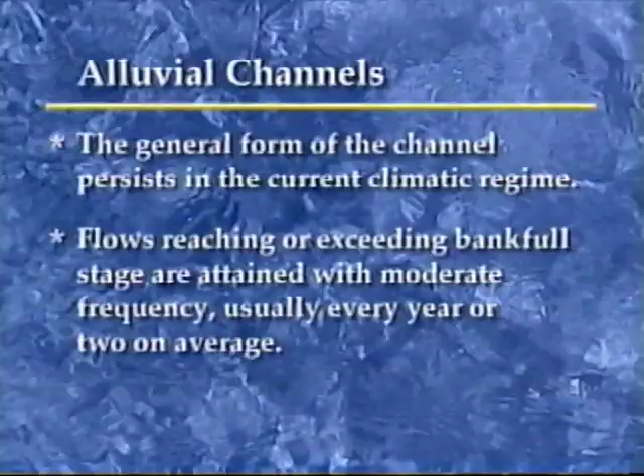Some other commonly accepted generalizations about alluvial channels are that the general form of the channel persists in the current climatic regime. Flows reaching or exceeding bankfull stage are attained with moderate frequency, usually every year or two on average. Bankfull flow is a surrogate for the full range of flows that form the channel. Bankfull flow completely fills the principal channel to the elevation of the floodplain.

The bankfull, then, is a surrogate, in a sense, for the whole range of flows which make up the channel, but proves to be a value that can be useful in talking about the behavior of the stream channel and, in part, the range of flows that matter in sediment transport.

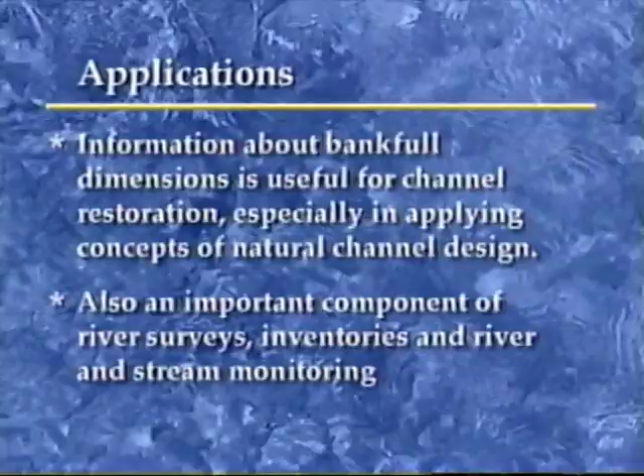Information about bankfull dimensions is useful for channel restoration, especially in applying concepts of natural channel design. Information about bankfull discharge and the bankfull stage is also an important component of river surveys, inventories, and river and stream monitoring. Many protocols rely in part on some aspect of bankfull stage and discharge identification. In all cases, correct and consistent field technique is essential in providing scientifically defensible information.

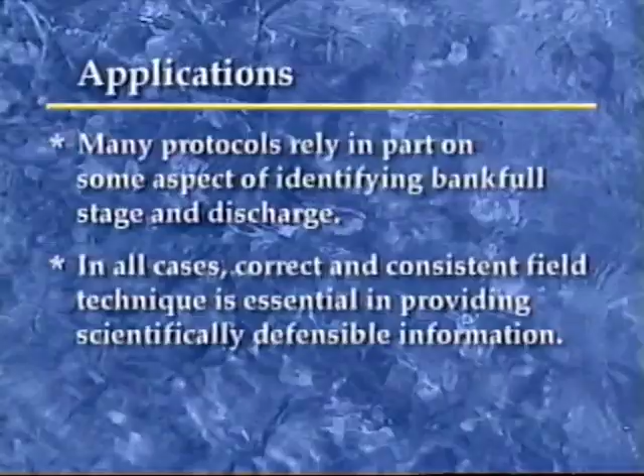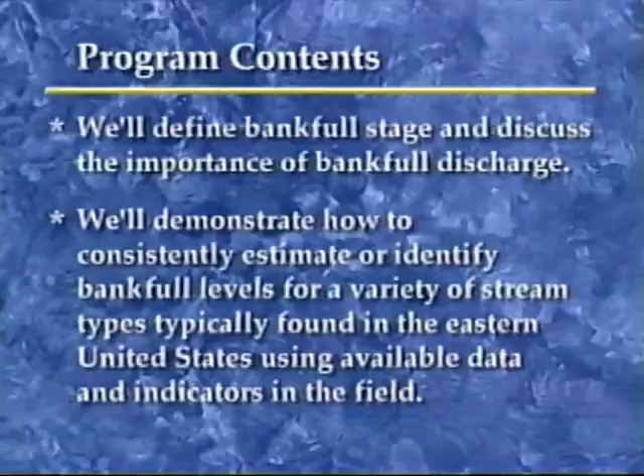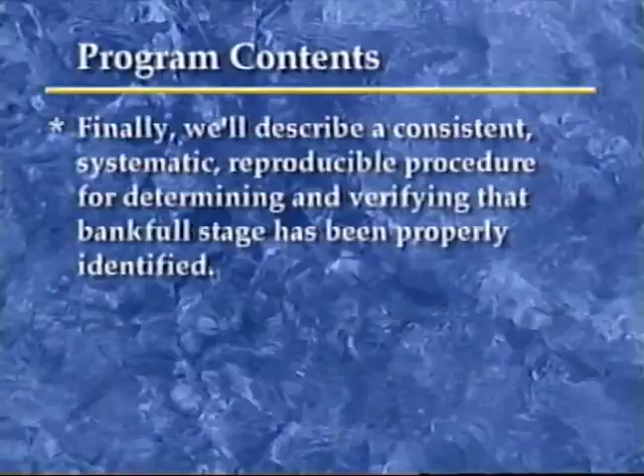In this program, we'll discuss various aspects of bankfull determination. We'll define bankfull stage and discuss the importance of bankfull discharge. We'll demonstrate how to consistently estimate or identify bankfull levels for a variety of stream types typically found in forested areas in the eastern United States, using available data and indicators in the field. Finally, we'll describe a consistent, systematic, reproducible procedure for determining and verifying that bankfull stage has been properly identified.

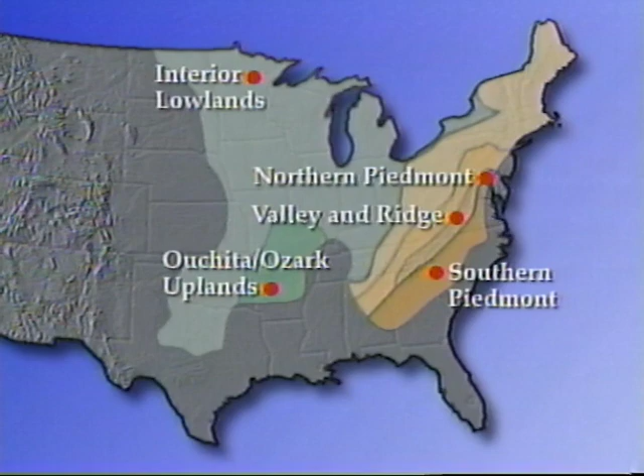As shown here, our discussion of bankfull stage in this presentation will focus on forested streams representative of those found in a variety of different regions in the eastern United States.

Bankfull stage is defined as that stage when stream water just begins to overtop the floodplain. The floodplain is defined as a relatively flat depositional surface adjacent to the stream and being built and rebuilt by the stream in the present hydrologic regime. Accordingly, a floodplain along one or both banks is necessary for the determination of bankfull stage. Bankfull stage, then, is the stage at which water just begins to flow onto the floodplain.

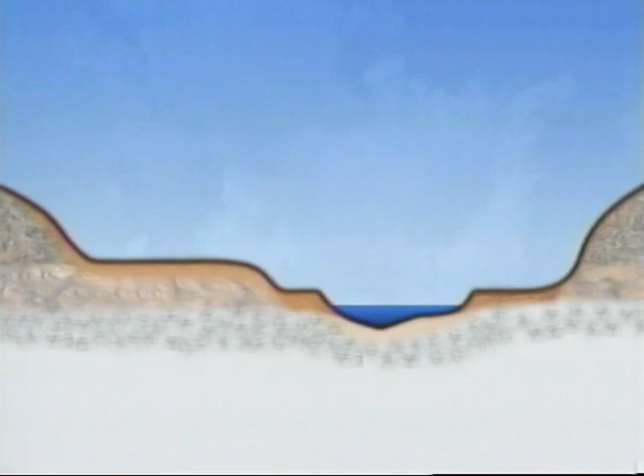The key to identifying bankfull level is to identify the floodplain, the flat depositional surface immediately adjacent to the river that is formed and reformed by the river under current hydrologic conditions. Although shown as flat surfaces in this diagram, floodplains and terraces may slope away from the channel slightly and may be traversed by a complex mosaic of remnant features, depressions, or subtle swales of previous channel positions. In many instances, natural levees slightly above the bankfull stage will border the channel.

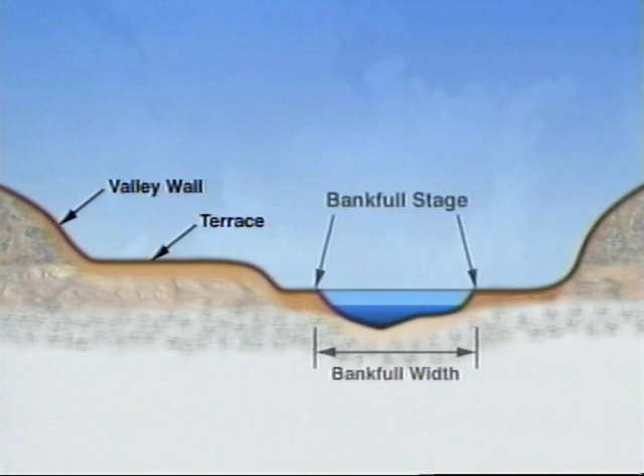The important thing to remember is that Bankfull stage occurs when water just begins to overtop the floodplain. The key to identifying Bankfull stage is to locate the relatively flat depositional surface of the floodplain. The Bankfull stage, of course, represents an integration of a range of flows that carry a range of discharges as well as a range of sediment in transport.

And hence, in a way, the Bankfull discharge is a surrogate or substitute for the sequence of flows responsible for the formation of the channel. It can be useful then in that surrogate sense, but it does not physically describe in and by itself the flow that has made the channel, because that is not a constant flow. It is a range of flows from low to high, requiring both deposition in the one instance and erosion at the same time.

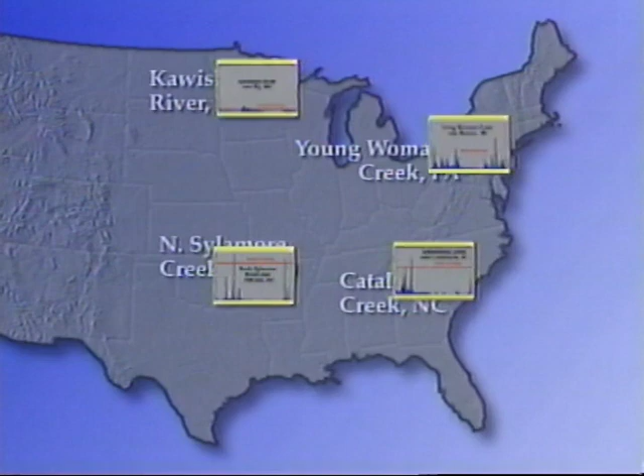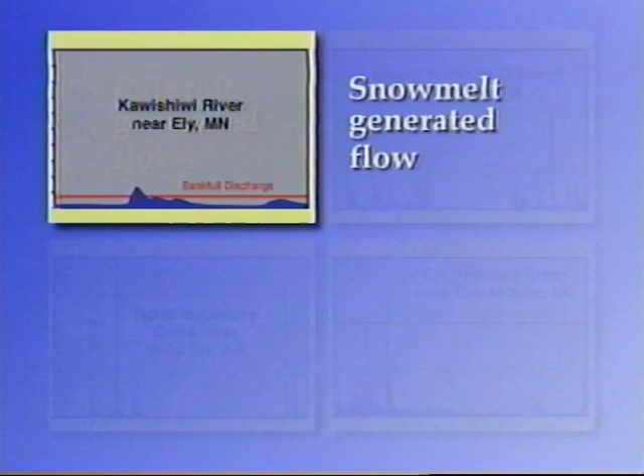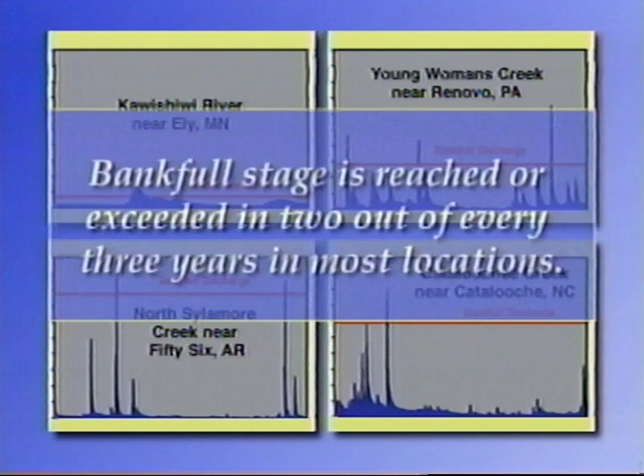Now let's look at data from 4 U.S. Geological Survey hydrologic benchmark station sites and discuss the frequency at which Bankfull flows occur in different regions of the eastern United States. Hydrographs for these sites illustrating unit runoff to the same scale over a single year show seasonal trends that are principally generated both from snowmelt and from rainfall. Peak discharges in any given year in any given location may be greater or lesser than those shown here. On average, Bankfull stage is reached or exceeded in 2 out of every 3 years in most locations.

Compared to other regions of the east, runoff in Minnesota tends to be of lower magnitude than moister areas in the east and south. When Bankfull stage is reached during spring runoff, flows frequently stay above Bankfull for extended periods of time. Occasionally, there may be short periods of above bank flows from rains in the fall. By contrast, in most other streams in the east and south, the timing of flows exceeding Bankfull discharge is very irregular, typically occurring 2 to 3 times a year.

Because these flows depend on large storms or saturated soil conditions, they tend to stay above Bankfull for short periods of time. However, the cumulative duration of flows exceeding Bankfull stage in these rain-dominated systems is approximately equal to that from snowmelt regimes and are therefore sufficient to accomplish the work necessary to form and maintain the channel.

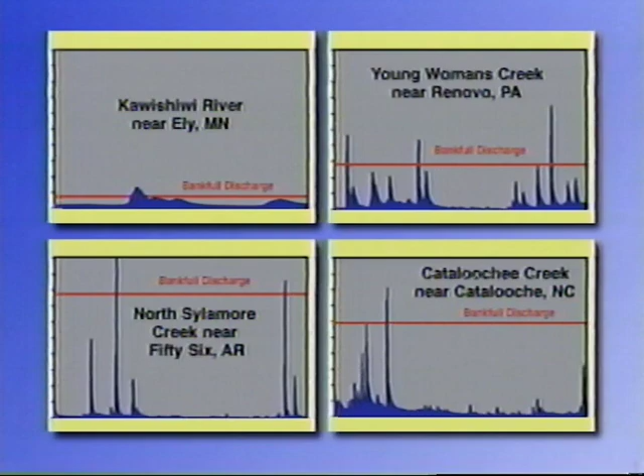Flow in these regimes is driven by rainfall events. Large rainfall events may occur any time during the year. In the snowmelt regime, it occurs only at one particular time of the year, and it is all at one time, whereas there may be successive bankfull events in a year, the cumulative duration of which may be similar to a snowmelt event, and this supposes that the amount of work being done would be similar in both cases.

Most people take finding the bankfull elevation seriously, and you should too. But to be honest, when you're new at this game, you're probably too conscientious, maybe too picky, too enthusiastic. A lot of people jump right into the channel and start looking for the bankfull elevation. There are just too many opportunities to pick up false indicators when your eyes start down in the channel. Instead, back up and get the bigger picture.

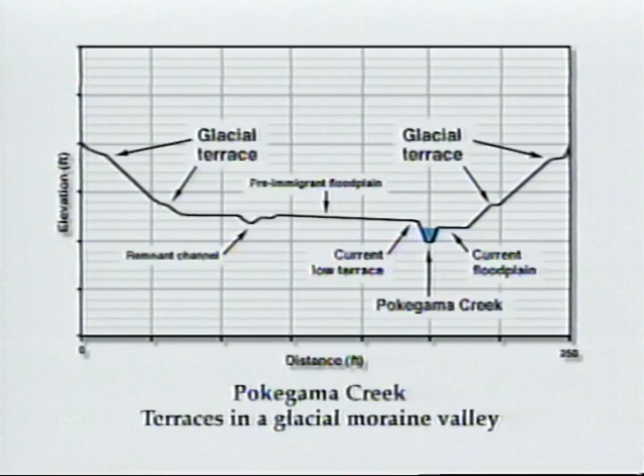We're southwest of Grand Rapids now on the Sugar Hills Moraine, a glacial terminal moraine. And as we look across this valley, we see the high hills on either side of it. These are glacial terraces. And there are several levels, 2, 3, 4, even 5 levels as we go down these hills. But what I want you to see before we get to the stream is the valley flat. That's the elevation where you want to begin looking for the bankfull elevation.

When we get down closer, we can look and see if there is a low terrace and, of course, the actively forming floodplain. This area was harvested first in about 1872 when large white pine were removed. At that time, Pokegama Creek behind us in the center of the valley downcut about a foot. So let's go down and see if we can find the difference between the low terrace and the floodplain.

We're down in the valley of Pokegama Creek, an E5 channel, sandy sediment. I'm standing here on a low terrace, but if you look behind me, you can see the high hill, which is the glacial terrace. About midway down the hill is a mid-terrace. I'm on a low terrace. It's the elevation of the floodplain over 130 years ago. The slackwater channel in front of that terrace is the channel in 1872 when the white pine was cut.

And the active channel is about 10 inches lower in the foreground. And you can see where its floodplain is now. So this stream has downcut about 10 inches. But think about the valley that you're in when you're looking at low terraces. For instance, we might be in New Hampshire or Maine on the Whitewater River where sediment is the size of big cobble like footballs, and the stream may be a river 150 feet across. In a bigger scale situation, the low terrace may be 2, 3, even 4 feet above the current floodplain.

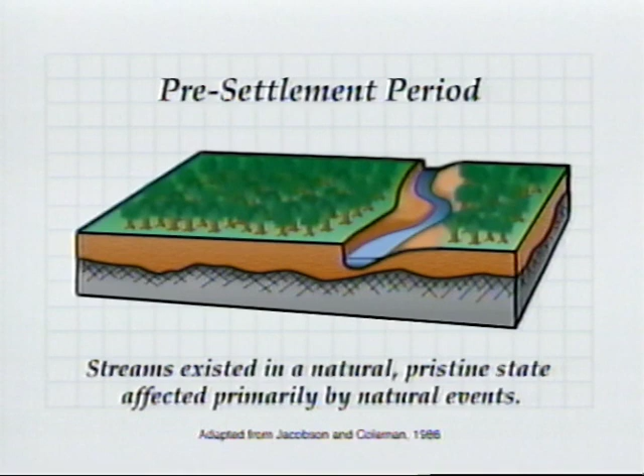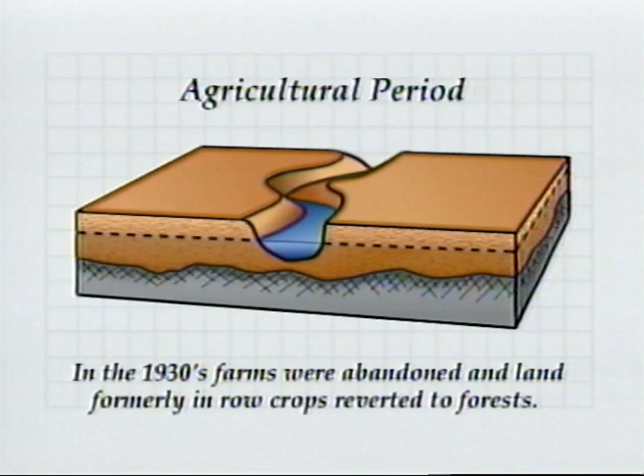In many parts of the south and east, land was heavily forested in the pre-settlement period. Streams existed in a natural, pristine state, affected primarily by natural events. As settlement in the agricultural period began, forests were cleared and replaced by crops. Poor land use practices and farming techniques resulted in excessive upland erosion and extensive sedimentation, leaving alluvial deposits of up to 6 feet thick on the floodplains. In the 1930s, farms were abandoned and land formerly in row crops reverted to forests.

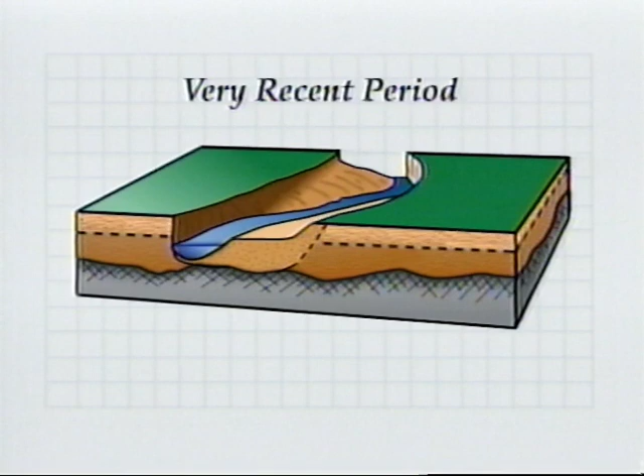With a general reduction in sediment load during the very recent period, a reworking of stored floodplain sediment has occurred. Downcutting and stream migration has resulted in export of fine sediment, retention of a smaller volume of coarse sediment, and streams have built new floodplains at lower elevations, leaving abandoned floodplains or terraces behind at higher elevations. Terraces may be formed over several periods of alluvial deposition and stream incision. Occurring repeatedly, it's possible to develop any number of terraces.

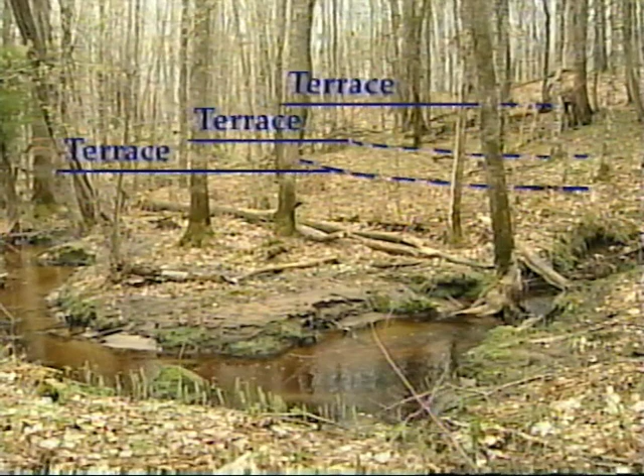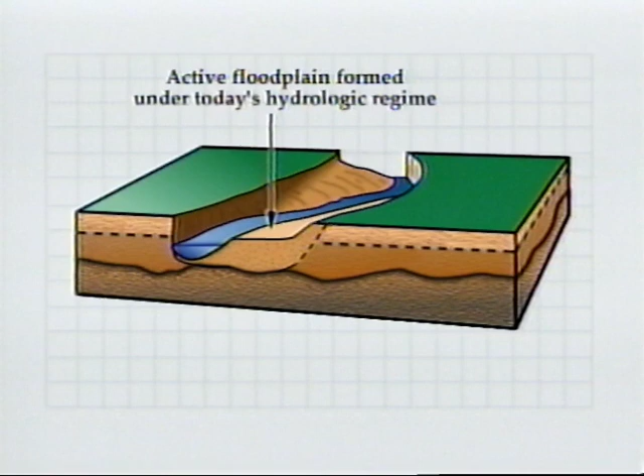In the present day, terrace remnants may be relatively continuous along a valley or only remain in isolated patches. Generally, when several terraces are present, it may be difficult to distinguish between the lowest terrace and the floodplain. Understanding past land use practices and geomorphic history can be useful in bankfull identification and help us properly differentiate the floodplain formed under today's hydrologic regime from terraces that were formed under different hydrologic regimes.

We're at Mantua Mill on Western Run in Baltimore County. This is in the Piedmont of the state of Maryland. I'm standing at the left edge of the water, and we flattened the grass here, and the depositional surface of the point bar is gradual, as you can see as I walk up the surface to the edge here of the floodplain, the flat surface that we're defining beyond.

The Bankfull stage then would be approximately where I'm standing, as defined by the intersection of the surface of the floodplain. Under ideal circumstances, one might have a similar surface on the opposite side, and the topographic feature defining the floodplain and the intersection with the Bankfull stage is critical in the field. One will often, not surprisingly in the field, have to clear away the vegetation to make sure that you're walking on a surface and not visually misperceiving the elevation of that surface.

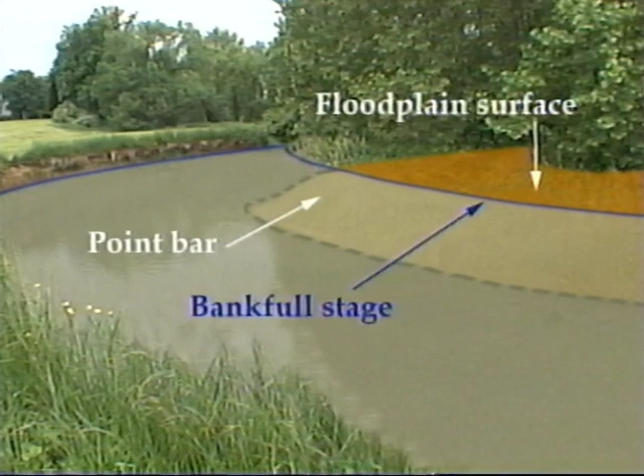Point bars are sloping surfaces found at the inside of meander bends. The floodplain often forms at the top of point bars as channels migrate laterally across a valley over time. The top of the point bar, therefore, is one of the best indicators of Bankfull stage. Let's see how the top of the point bar corresponds to Bankfull stage in a different setting, at Barbours Creek, a 13-square-mile watershed in the Appalachian Valley and Ridge province of Virginia.

One of the best indicators of Bankfull is the level top of the point bar. As I'm standing here, I am on the sloping surface of the point bar. I'll walk up slope. The slope flattens out, and now I'm standing at Bankfull elevation. At my feet are gravel and sand. As I go up slope beyond this, there's a transition to soil and vegetation.

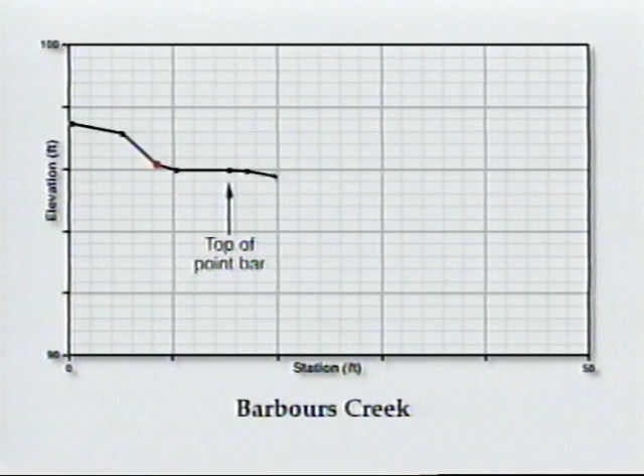The flow frequency associated with Bankfull at this location was determined using the HEC-RAS computer model and regional flood frequency regression curves. Based on this information, Bankfull approximates the 1.3-year flood event. Further up the slope, we have a low terrace that corresponds approximately to a 5-year flood interval. It's important to differentiate between the floodplain and the terrace.

As I step down here, I'm now standing on the flat upper surface of the point bar that represents Bankfull. Susan to my left is standing on a terrace that's inundated by approximately a 5-year flood event. Remember, Bankfull is the flat depositional surface at the top of the point bar. I'll place 2 flags here to show you where it is. And now walk down the sloping surface on the facet of the point bar to the water's edge to show you the relationship between the water and Bankfull at the top of the point bar.

I'm standing here in Gulf Creek in the Ouachita Mountains of central Arkansas. The Ouachita Mountains, along with the Boston Mountains and the Ozark-Salem Plateau, make up a physiographic region known as the Interior Highlands. The basin area at this point is about 5 square miles. Up here, we can see a very well expressed floodplain along Gulf Creek. Here we can see clear signs of floodplain development that we can use for identifying the Bankfull stage. In my opinion, the floodplain level is the only consistent indicator that we can confidently use in the interior highlands

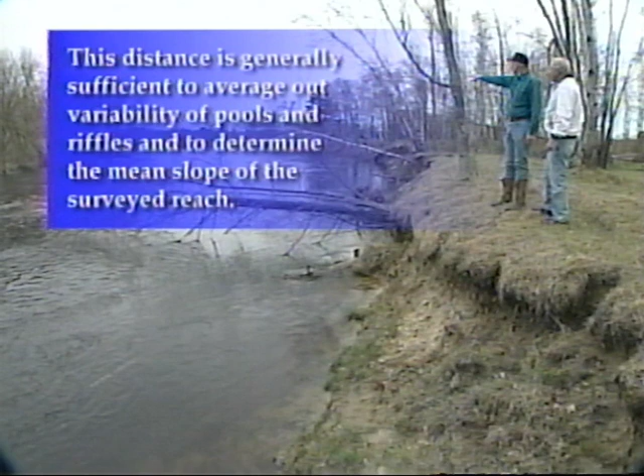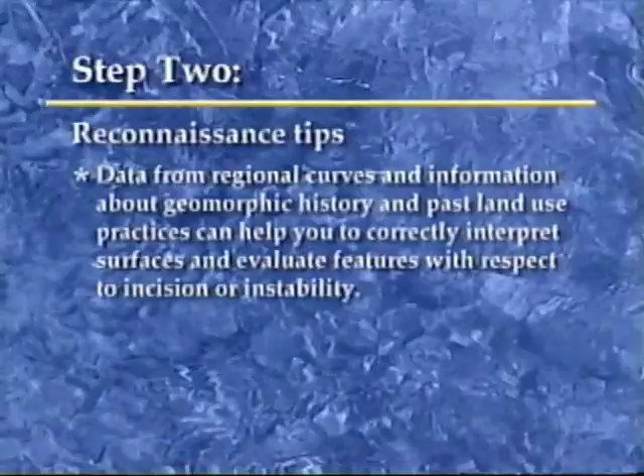A second step is to select a representative reach of the river in the field where a consistent bankfull elevation can be determined. Begin by doing a reconnaissance of the stream reach. Walk the reach for a distance of at least 20 to 30 channel widths to look for probable bankfull indicators. This distance is generally sufficient to average out variability of pools and riffles and to determine the mean slope of the surveyed reach. Data from regional curves and information about geomorphic history and past land use practices can help you to correctly interpret surfaces and evaluate features with respect to incision or instability.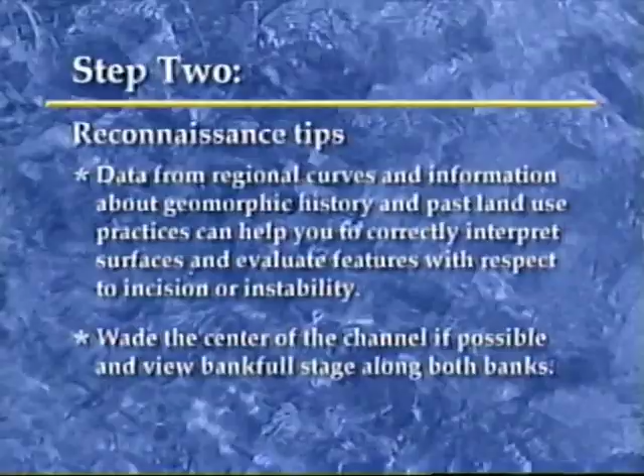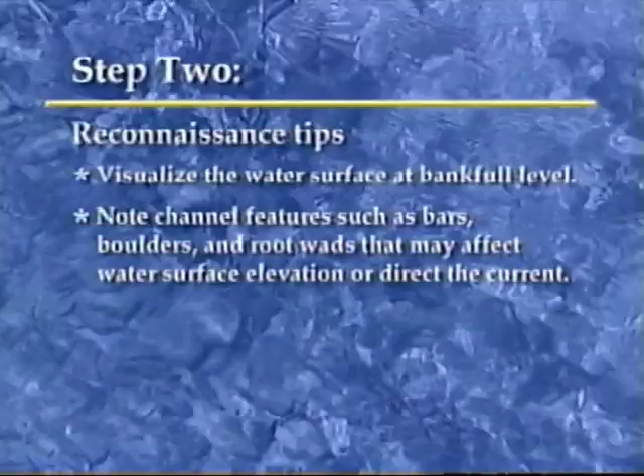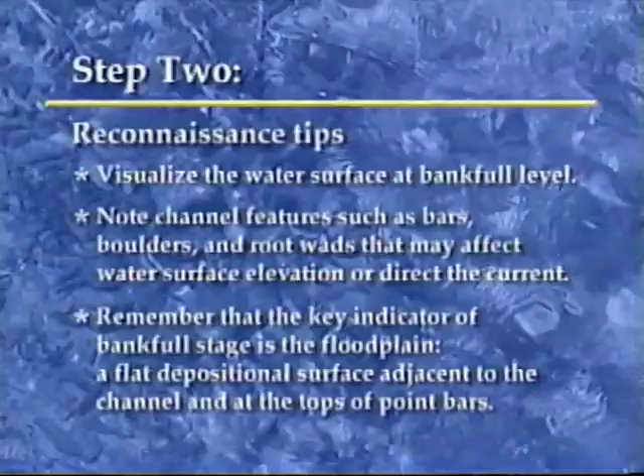Wade the center of the channel if possible and view bankfull stage along both banks. Visualize the water surface at bankfull and note channel features such as bars, boulders, and root wads that may affect water surface elevation or direct the current. Remember that the key indicator of bankfull stage is the floodplain, a flat depositional surface adjacent to the channel and at the tops of point bars.

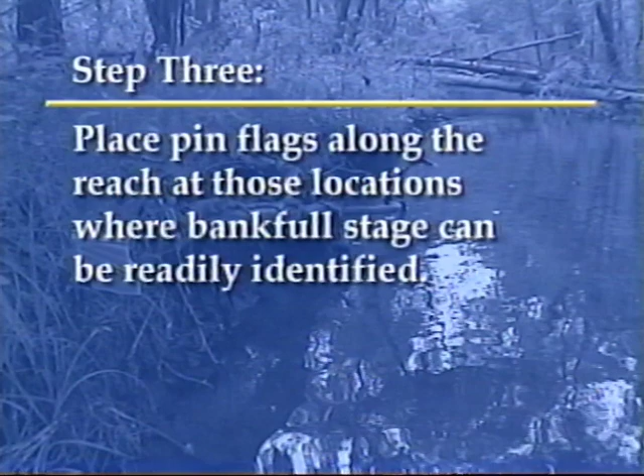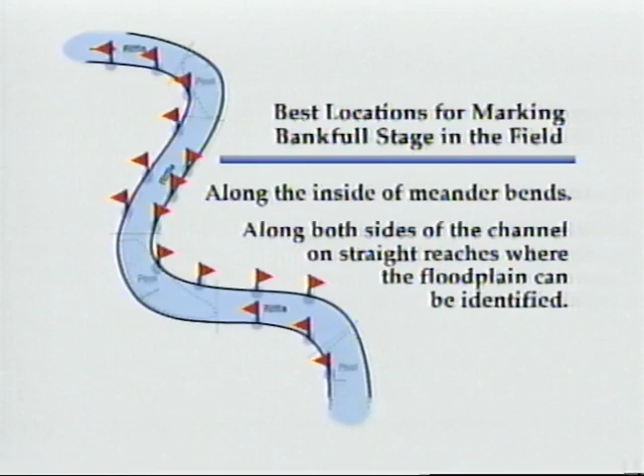When you have a general idea of where bankfull stage may be, place pin flags along the reach, but only at those locations where bankfull stage can be readily identified. That is, at locations where good indicators of bankfull exist. This generally means placing flags along the inside of meander bends and along both sides of the channel on straight reaches where the floodplain can be identified.

Avoid areas with active bank slumping, including the outside of meander bends, bedrock outcrops, areas with log jams, beaver dams, sections immediately above or below road crossings, and any areas with channel alterations or obstructions that might artificially raise or lower local water stage.

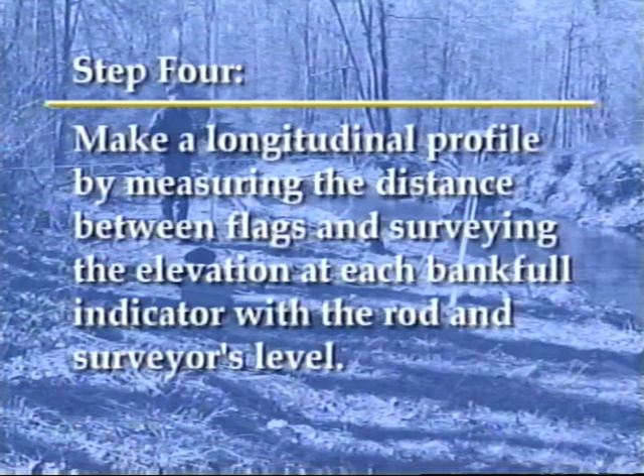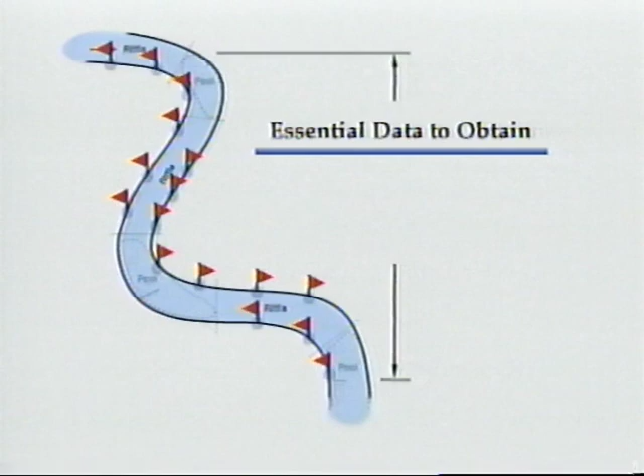The final test of bankfull stage is to make a longitudinal profile by measuring the distance between flags and surveying the elevation at each bankfull indicator with the rod and surveyor's level. While we can't cover all aspects of surveying a longitudinal profile here, the essential data to obtain is a distance and an elevation measurement down the center of the channel at each bankfull stage flag.

Specifics of how to do this can be found in the U.S. Forest Service publication, Stream Channel Reference Sites: An Illustrated Guide to Field Technique, and references such as Dunne and Leopold's book, Water in Environmental Planning, and Luna Leopold's book, A View of the River.

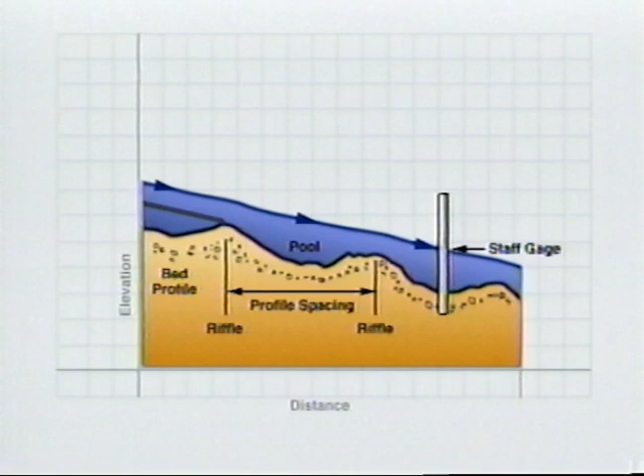Let's look briefly at typical relationships between channel features and the elevation at which they occur. Understanding these relationships can help you evaluate data obtained from a longitudinal profile. An important concept to understand is that as the water rises over bankfull during a flood, differences in the appearance of the water over pools and riffles tend to disappear, and floodplain deposition occurs. As a result, the slope of the riffles along the channel bed, the water surface, the surface of the floodplain deposited at bankfull stage, and the surfaces of terraces will all be close to parallel over a distance of about 20 times the channel width.

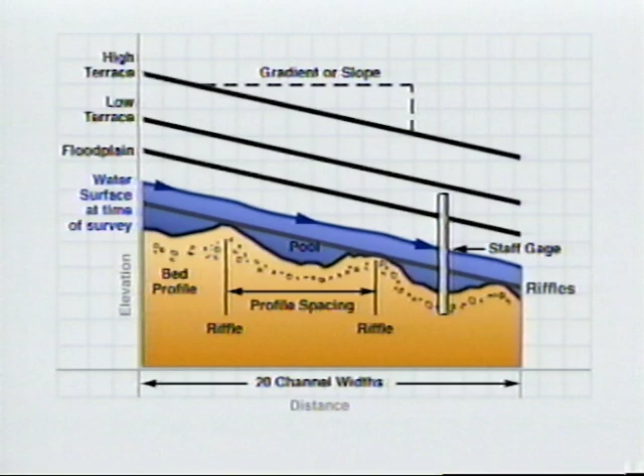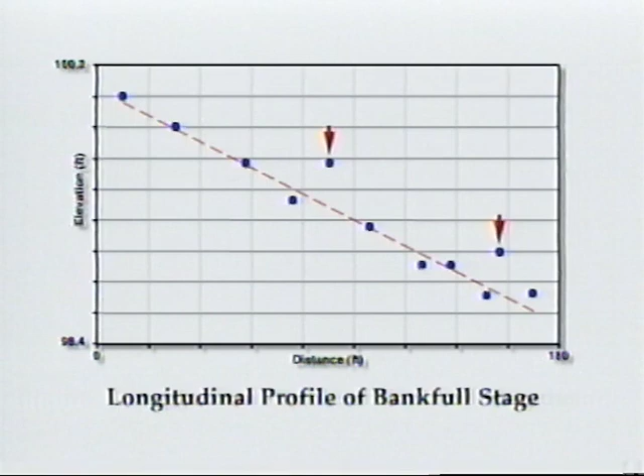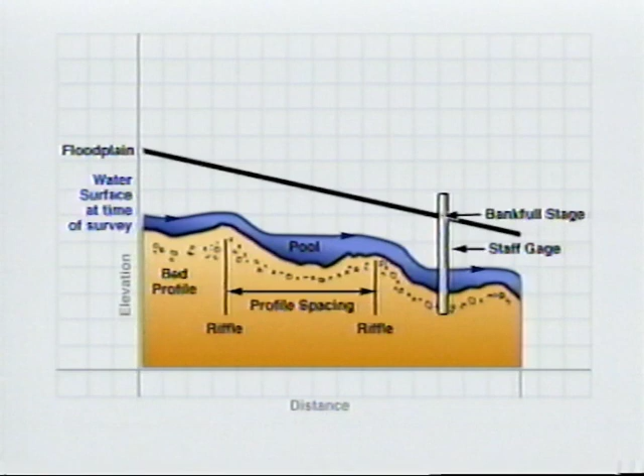The elevation of your flagged bankfull stages should be approximately parallel to the elevation of these other features along the longitudinal profile. By plotting data in the field, bankfull stage identification errors can be noted. Outlying points will be evident and may be rechecked and corrected if necessary. Where your longitudinal profile passes a stream gauge, the gauge height corresponding to the elevation of each channel feature can be determined. Gauge height corresponding to the average elevation of the floodplain is of special interest in confirming identification of bankfull stage.

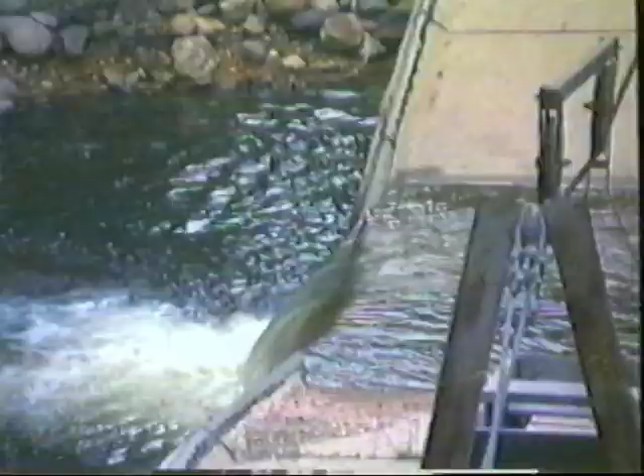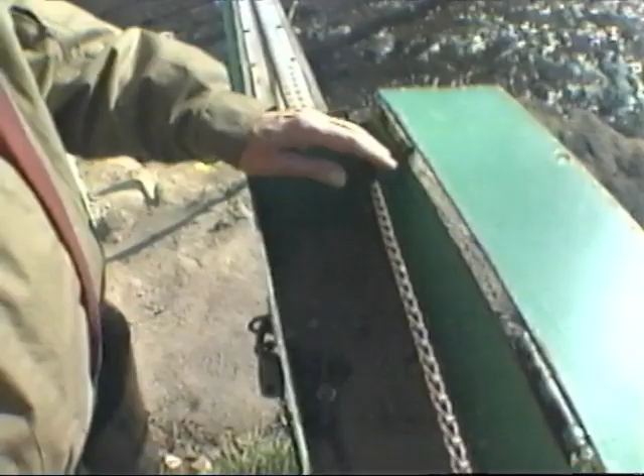Information from U.S. Geological Survey stream gauging stations can be especially useful in comparing field-determined Bankfull stage to known stream flows and their flood frequency return periods. To accomplish this, a longitudinal profile in the vicinity of a gauging station is surveyed. Elevations obtained are then compared with the discharges and return intervals from the gauging station's discharge rating curve.

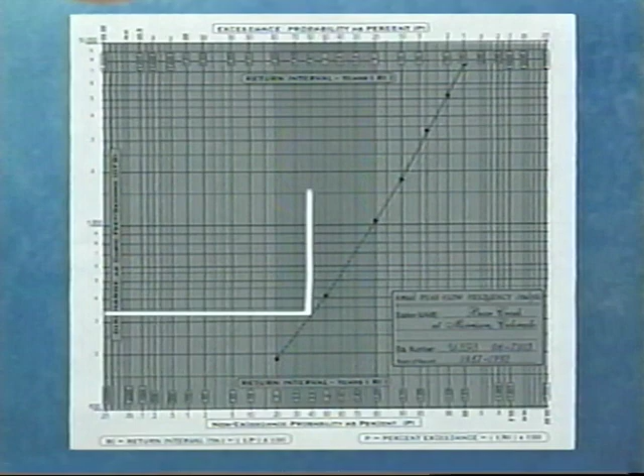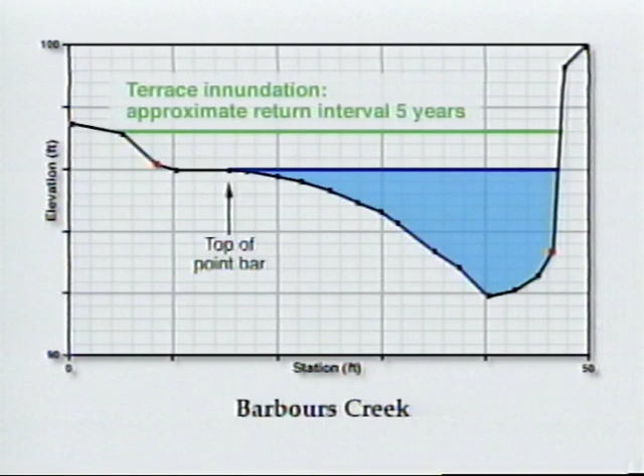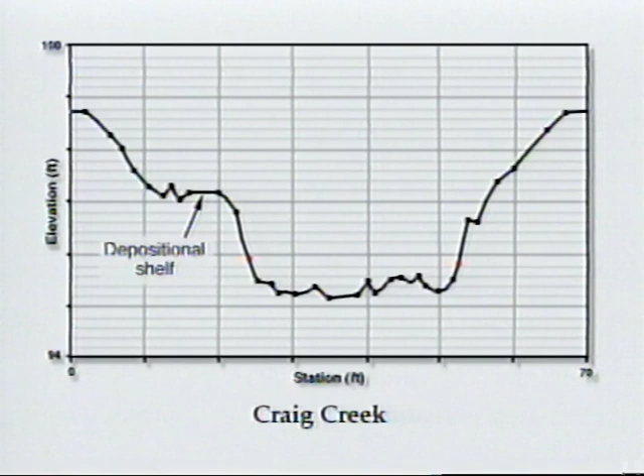As we saw, a channel cross-section plot from Barbours Creek indicated that the field-identified Bankfull stage at the top of a point bar correlates with a 1.3-year return interval, and the low terrace is at the approximate elevation of the 5-year flood. Another cross-section from nearby Craig Creek illustrates similar relationships for a cross-section on a straight channel reach with a flat depositional floodplain surface. Again, the depositional floodplain surface and Bankfull stage correspond with a 1.3-year flow, and the terrace is associated with the 5-year flow.

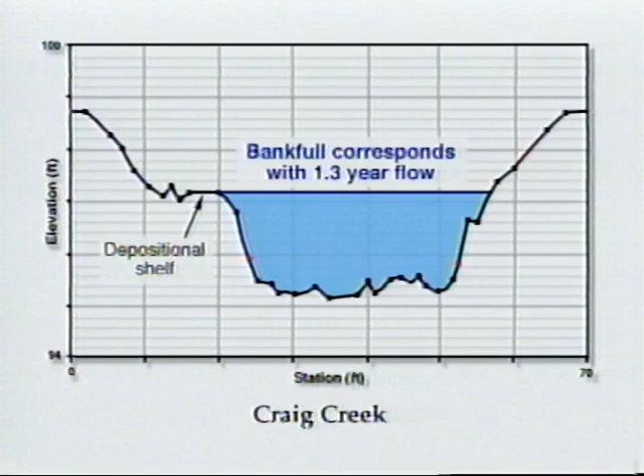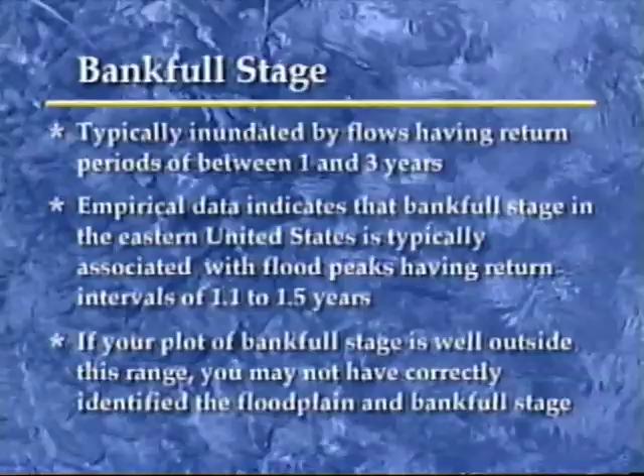As we've seen, Bankfull stage is typically inundated by flows having return periods of between 1 and 3 years. While there is considerable variability in the recurrence interval of Bankfull flow in different streams, empirical data from the eastern United States indicates that Bankfull stage is typically associated with flood peaks from 1.1 to 1.5-year return intervals. Therefore, if your plot of Bankfull stage is well outside of this general return interval range, you may not have correctly identified the floodplain and Bankfull stage in the field.

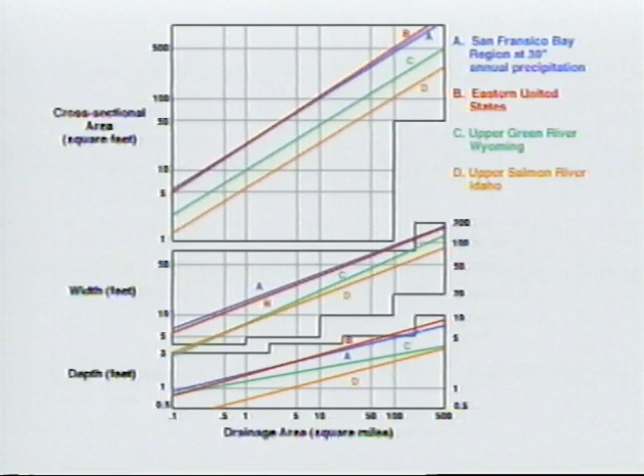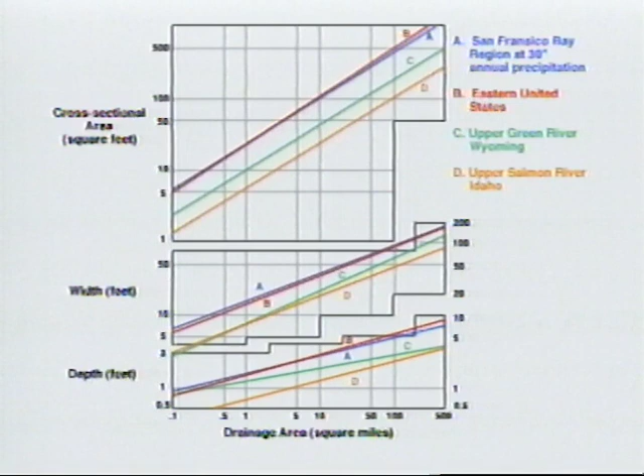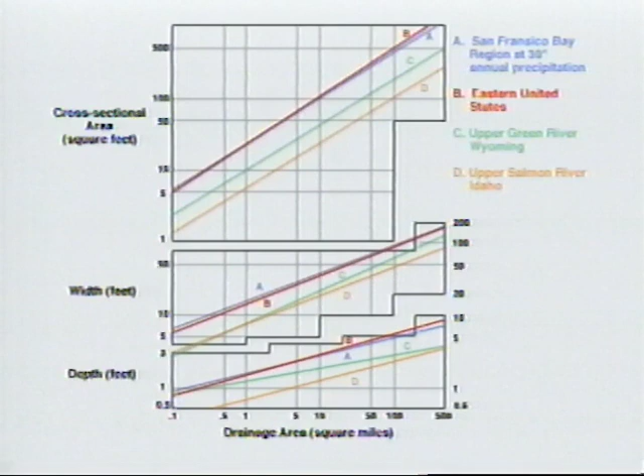Data from USGS gauges and other sources has also been used to develop empirical regional channel hydraulic geometry curves. These curves show general relationships between drainage area and a variety of Bankfull channel dimensions, including Bankfull depth, Bankfull width, Bankfull cross-sectional area, and Bankfull discharge in different regions of the country. Since the data are plotted as a function of drainage area, it's possible to estimate average channel dimensions and Bankfull discharge from these curves. The curve for the eastern United States encompasses drainage areas of various sizes and is derived from data compiled in a wide range of geographic regions.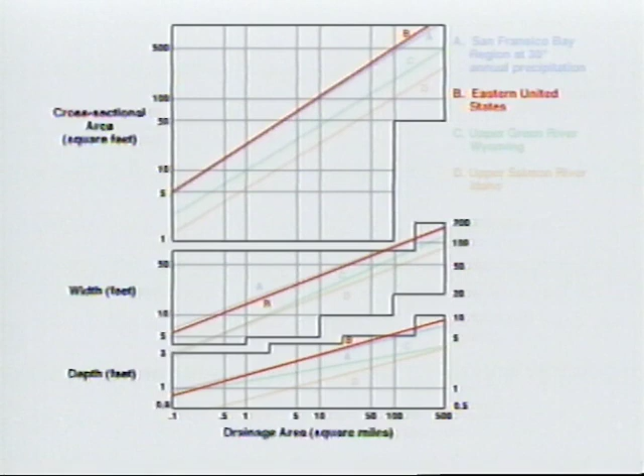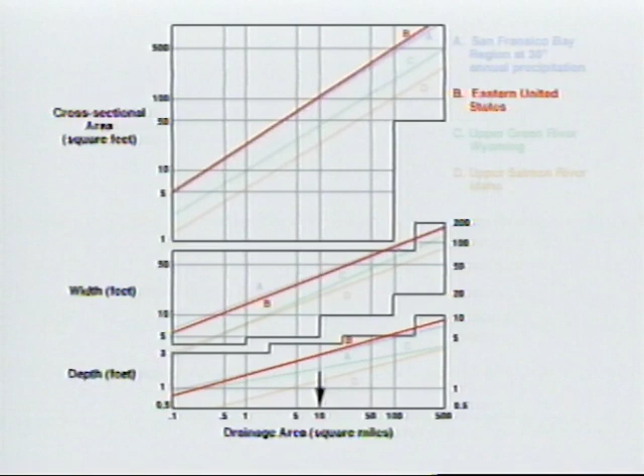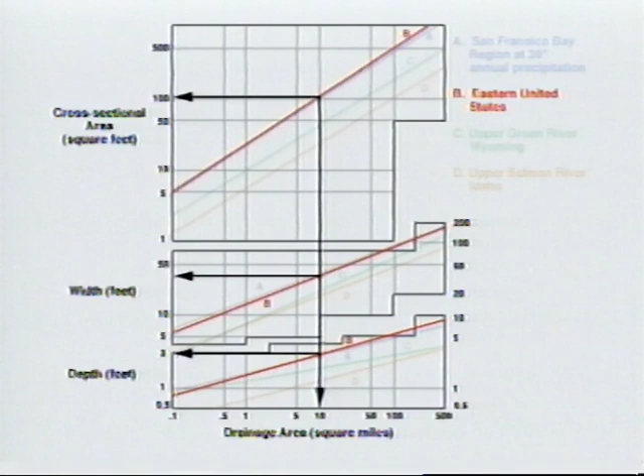Accordingly, there is a high degree of variability associated with these curves, but they can be useful in making rough ballpark estimates of where to begin to look for Bankfull stage in the field. To do so, simply determine the drainage area for a particular river or stream from a map prior to going into the field. Then locate desired channel dimensions on the regional curve corresponding to that drainage area. These general values can then serve as a rough guide of where you might expect to find the floodplain and bankfull stage in the field.

As we've seen, identification of bankfull elevation may be difficult in the field. This is especially true where the valley bottom is too narrow for an active floodplain, in steep gradient streams that lack a floodplain, and in deeply incised, actively changing channels that lack floodplains due to instability. In all of these cases, there may be no depositional surface identifiable as the floodplain.

Another factor confounding bankfull stage identification in the eastern United States is the preponderance of lush vegetation. Remember that grasses, sedges, and near-stream trees often grow below bankfull elevation in the eastern United States, and some species, such as willows, always grow below the bankfull elevation. Other vegetation features, such as the limits of moss growth, lichen lines on rocks, and the lower end of scoured roots, are also poor indicators of bankfull stage and tend to occur below bankfull in the eastern United States.

Because vegetation frequently obscures sandy depositional surfaces adjacent to streams, try to identify bankfull stage at times of the year when vegetation is minimal. Sometimes it's advantageous to remove vegetation in order to see bankfull depositional features, as in this example from the Mississippi River, where grass has been mowed to show the bankfull surface. And it shows the flat, sandy depositional surface of the point bar. That is the bankfull elevation where it flattens off.

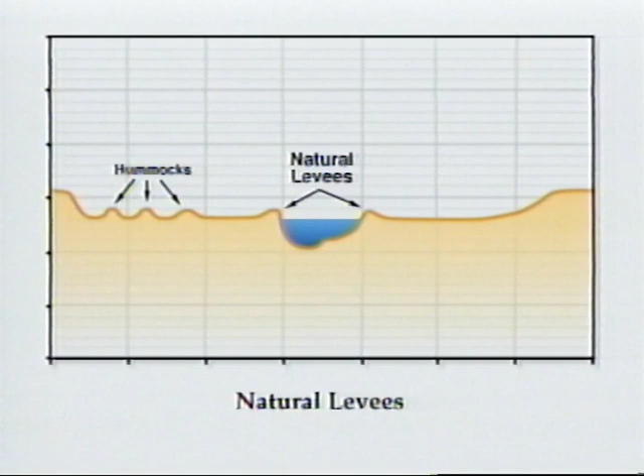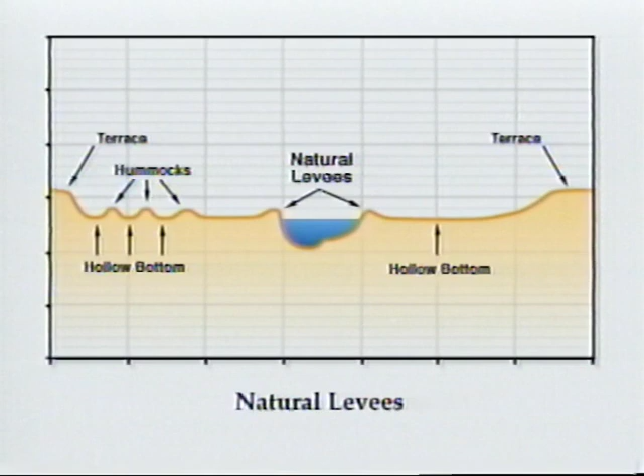Be aware of natural levees in the eastern United States. Levees tend to form along many channels, but natural levees, unlike their man-made engineered counterparts, are not continuous. Thus, channel water will spread onto the floodplain behind the levees through natural breaks. The top of the levee is not the bankfull surface, even though it is a depositional feature. Bankfull elevation is typically associated with the elevation of the somewhat lower surface behind the levee.

Across from us here is a point bar with a grassy mound, and actually the top of that mound in this wetland system is the top of the hummock. If we look farther back at the brown sand that's deposited in the hollows, that in fact is the elevation of bankfull. So when you're out in these wetlands, dig down through the grasses and look for that flat hollow bottom that's in between the grassy hummocks, because that is the true bankfull where the water first begins to spread out of the channel.

Stream channels are extremely complex, and channel features are formed by a variety of interacting mechanisms. Banks are not always the same height on both sides of the channel due to factors such as bedrock outcrops, colluvial input from hill slopes, bank slumping, or past channel influences that may affect sediment deposition.

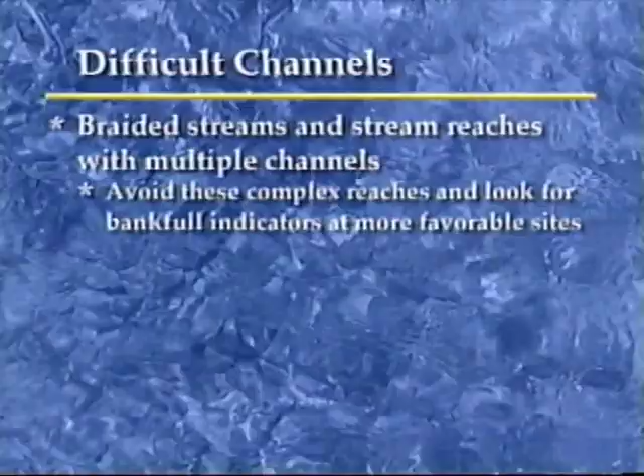Braided streams and stream reaches with multiple channels can be particularly vexing. The best strategy in many of these situations is to avoid these complex reaches and look for bankfull indicators at more favorable sites. Stream channels are continually changing and may be out of equilibrium for a period of time. It's important to be able to understand and recognize factors that disrupt channel equilibrium.

Isaacs Creek in the Piedmont of South Carolina provides a good example of a channel that is still working to regain its equilibrium. However, even in these channels, bankfull features can be identified as they form within an enlarged, incised channel.

Finally, wetland streams are important, especially in the lake states, and proper identification of bankfull stage in these settings requires special consideration. We're at Sand Creek, northeast of Grand Rapids, Minnesota, in a typical lake state wetland stream. It's an E5 channel, drains approximately 10 square miles. The wetland system may represent as much as 50% of the channels in the lake states.

But the floodplain here has a hummock and hollow topography to it. It's quite rough. And so the question becomes, when you're looking for bankfull elevation, just where in this rough topography is the bankfull elevation? The key to remembering this is that the floodplain is a point where the energy of flowing water and the energy of flowing sediment spreads out.

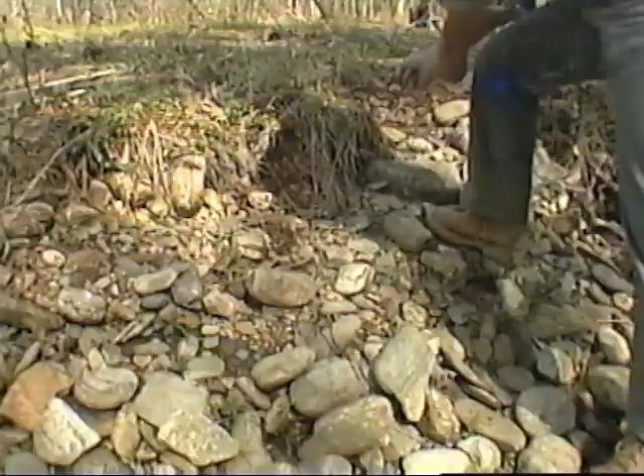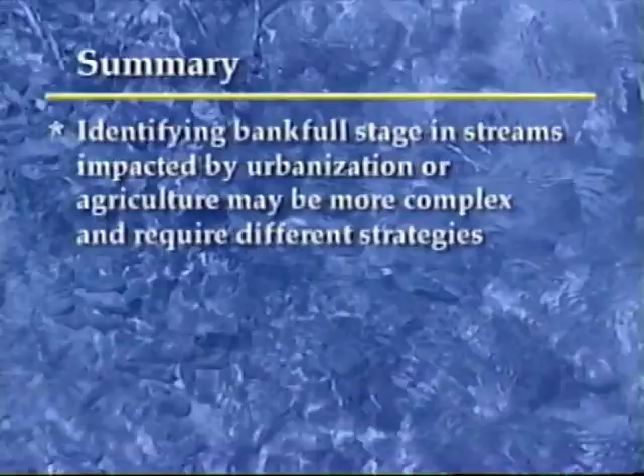As we have demonstrated, finding bankfull stage in the field can be difficult. In this video, we have concentrated on field identification of bankfull stage in forested streams of the eastern United States. Identifying bankfull stage in streams impacted by urbanization or agriculture, while conceptually similar, may be more complex and require different strategies. These impacted streams will differ from those in more natural states of equilibrium in the same region.

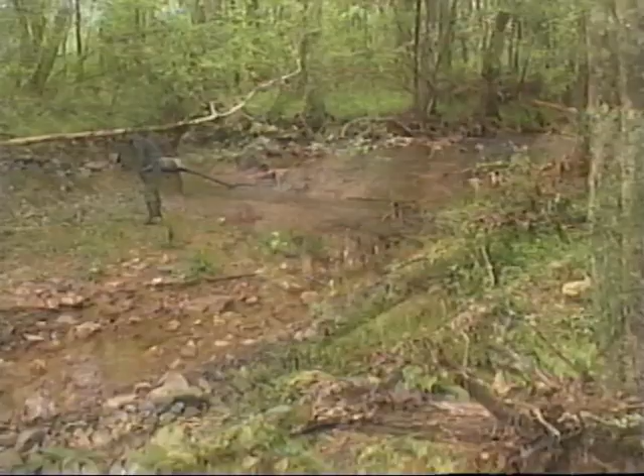Be aware that unless some semblance of equilibrium exists, bankfull channel size is still evolving, and apparent indicators of bankfull stage are likely invalid. Due to the variety of stream types found in different geographic locations, consistent identification of bankfull stage requires a rigorous and complex observation process. To assure consistent identification of bankfull stage, keep the following in mind as you head for the field.

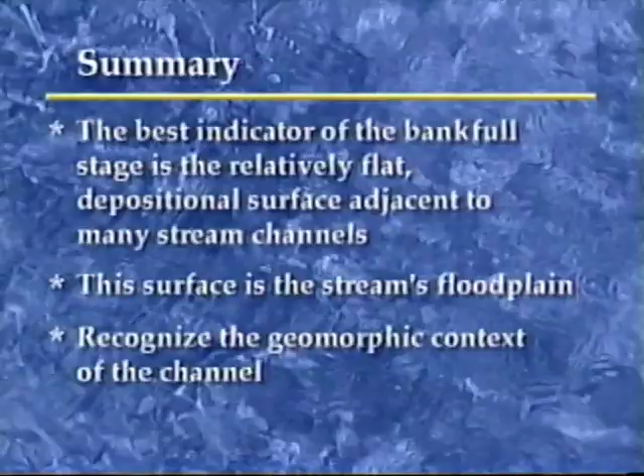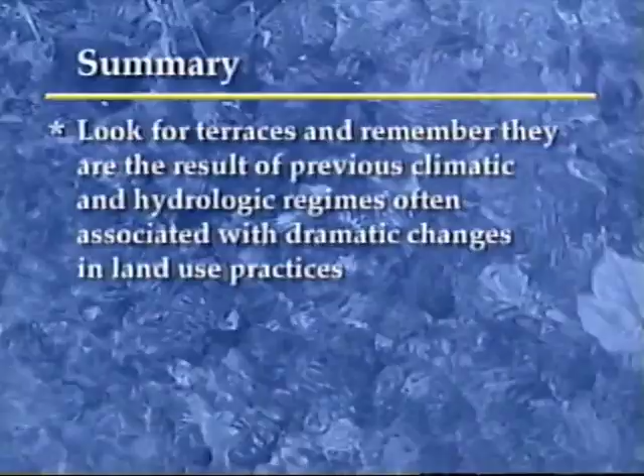The best indicator of bankfull stage is the relatively flat depositional surface located adjacent to many stream channels. This surface is the stream's floodplain. Recognize the geomorphic context of the channel. Look for terraces and remember that they are the result of previous climatic and hydrologic regimes, often associated with dramatic changes in land use practices. Be especially careful not to confuse the level of the low terrace with that of the floodplain.

Recognize that floodplains may not exist along all stream channels. They are most prominent along low gradient, meandering streams. In progressively steeper channels, floodplains may be intermittent on alternate sides of meander bends, or they may be completely absent. Steep, confined streams and streams undergoing rapid change often lack distinguishable floodplains altogether.

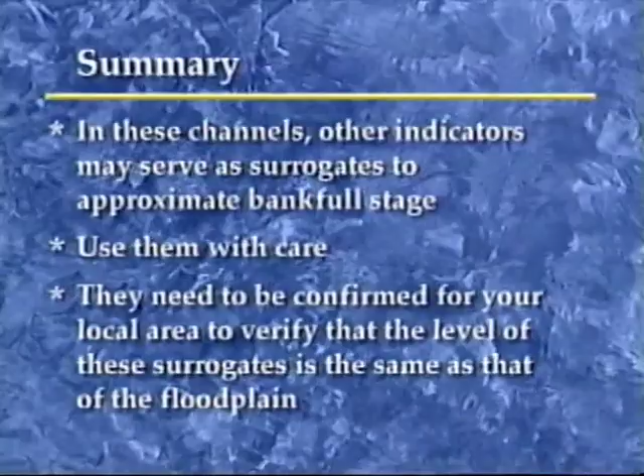In these channels, other indicators may serve as surrogates to approximate bankfull stage. Use them with care, and remember that they need to be confirmed for your local area to verify that the level of these surrogates is the same as that of the primary depositional surface indicator of the floodplain. Likewise, don't be fooled by recent channel disturbance in incised channels. Recently disturbed streams may give false indications of bankfull. In these channels, the newly building floodplain within the incised channel is the bankfull stage, not the top of the original stream bank.

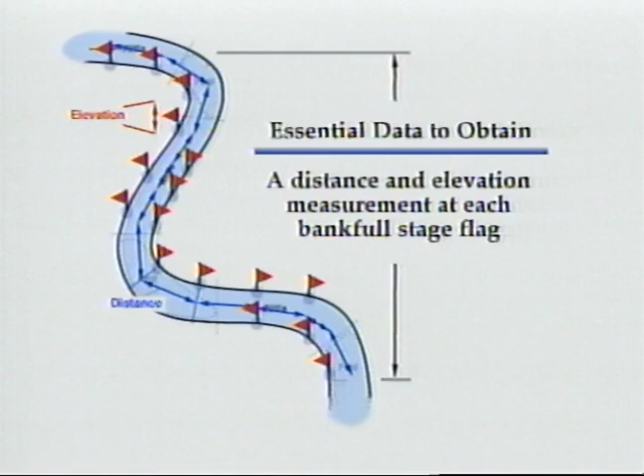Employ a systematic approach to bankfull determination. Identify bankfull indicators along a longitudinal reach of the stream instead of at a single location. Use the profile of bankfull elevations from these multiple locations as your guide. Use longitudinal profiles at existing U.S. Geological Survey stream gauges when possible, as this is an excellent way to verify that the surface you've identified is indeed the floodplain and not a terrace or scour feature.

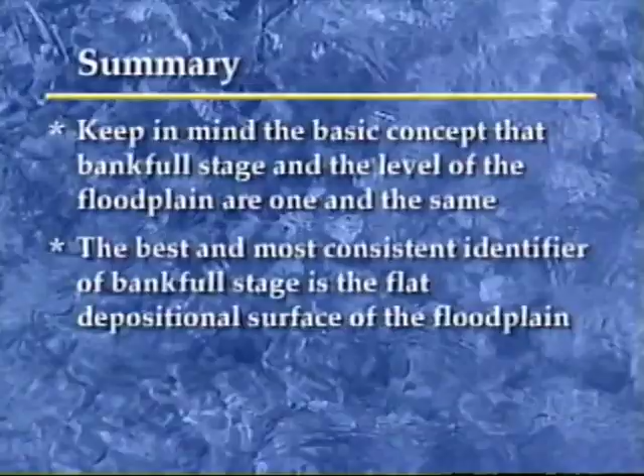As you do this, always keep in mind the basic concept that bankfull stage and the level of the floodplain are one and the same, and that the best and most consistent identifier of bankfull stage is the flat depositional surface of the floodplain, a surface formed and reformed immediately adjacent to many forested streams in the eastern United States.